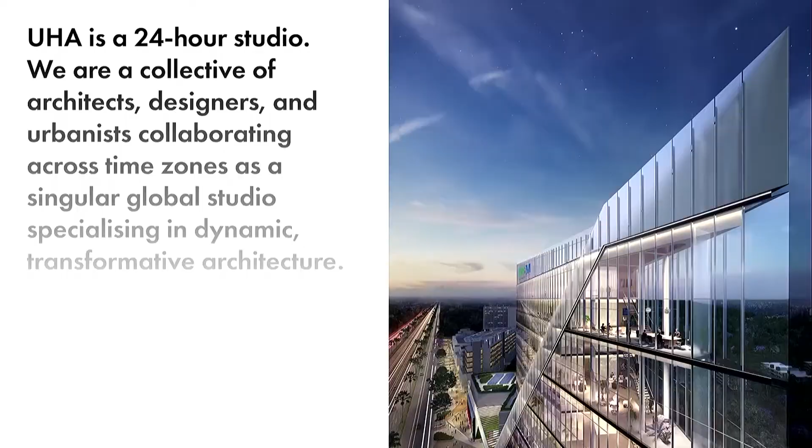So it sounds like a cliche, but we're very much a 24-hour studio. We have a team from Tokyo, Japan over to Mexico City, so we can actually work 24 hours. It's a very young team.

Our studio in Mumbai, the average age must be about 25 to 30. It's an all-Indian crew here in India, and we're doing some amazing buildings in Gurgaon and Delhi, Mumbai and Pune.

We were established in London in 2011. Before that, I used to work for a fairly well-known architect called Norman Foster. And the Mumbai office was founded quite early on in 2013. So we have these separate studios that work as one collective.

Now, how do you work efficiently in all of these places? And I've underlined the word efficient because it takes some logistics to make all of that happen.

I'm not quite sure why we're going from west to east, since the day starts in the east, but we have a series of satellite offices, our headquarters in London. We have one guy in Japan, and all of our satellite offices are set up and run by guys who've worked in the studio in London for us for a number of years and then go back home. I've lost count of how many nationalities we actually have in the studio, but we are genuinely working in 6 time zones to produce projects in all of these places.

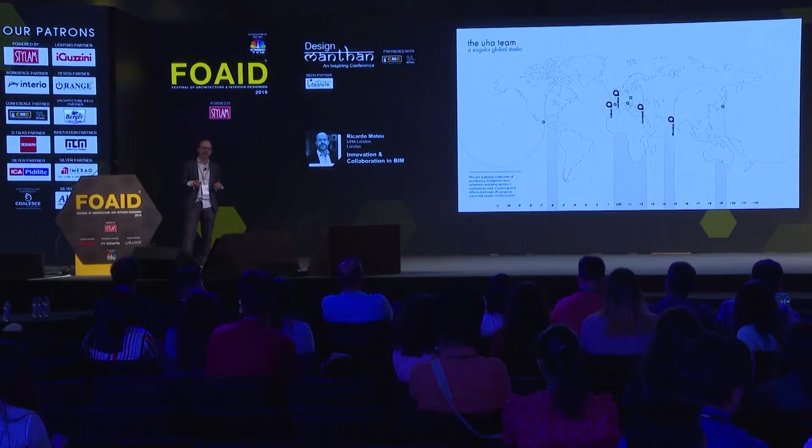So we have the headquarters in London. We have a new office just opened in Lisbon, Portugal, and they've already picked up a new project over there. We have a new visualization arm set up in Budapest, Hungary. Quite an established office now in Cyprus, where we have a lot of work, and our first satellite office, which was Mumbai.

So the 24-hour studio, does it really work? Well, yeah, I think the downside is I have to stay awake for 24 hours to talk to everybody, but we can start in the early morning, briefing Japan, and then they will go to bed and get up the next day and do a day's work while we're asleep in London, and so on.

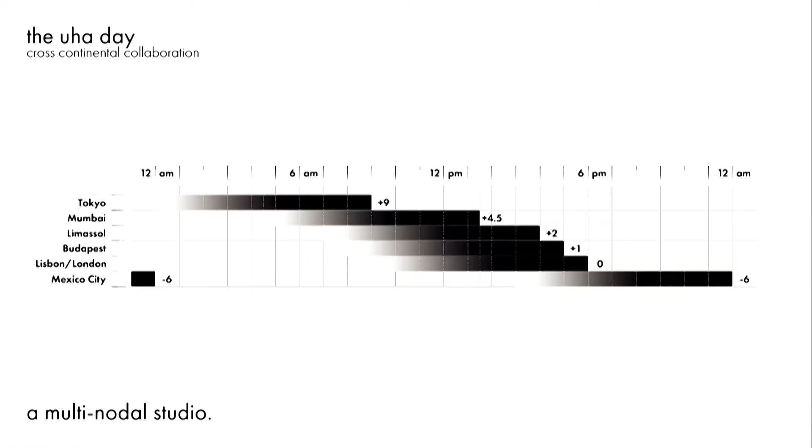So we've got Japan, Mumbai, catching up, GMT plus 4.5 hours. Then Europe, the European offices, which are 2 hours or 1 hour ahead of us. Then London, Lisbon's the same time zone as us. And then Mexico City, which is obviously 6 hours behind. So we have a genuine 24-hour work cycle.

And this allows us to meet our clients' demands. I'm sure all of the architects in the room know that every client wants their project yesterday, generally. And while we can't quite achieve time travel, we can do things in record time to give them the results they want. So how do we do this?

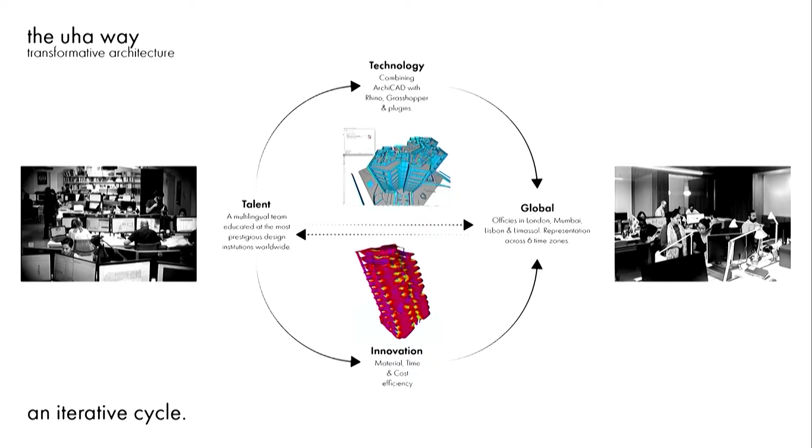Obviously, we have a great pool of talent from across the world, and although the politics of the UK don't seem to be on a very even keel at the moment, we still have a huge pool of talent there that comes to London from across the world. Less Europeans these days, unfortunately, but many Indians, many people from the Far East as well. And we have a great ability to attract these people by doing exciting projects in all of the places we work in.

We'll try and use the most modern softwares available. We're heavily into BIM. We work very closely with Graphisoft and have developed some really interesting plugins between the parametric modeling side of things and BIM, and generally move into BIM at a very early stage in the process. We also have structural engineers in-house in London, so we're trying to innovate and bring structural engineering innovations from quite an early stage in the project.

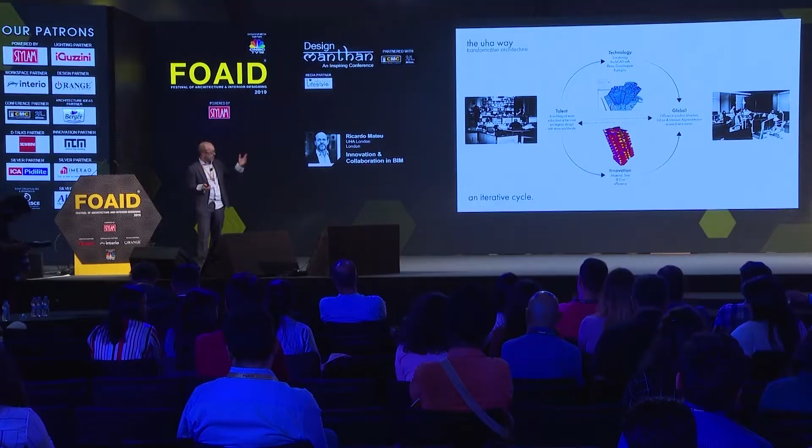It's always a battle to convince clients that we need all the consultants from the beginning, but I think when they see the work that we can produce by working in harmony from an early stage, they can appreciate the results. This is an image of the Mumbai office over on the right-hand side. It looks like it's inhabited by desk lamps more than people, but there's a great team there in Mumbai, one of our best, actually.

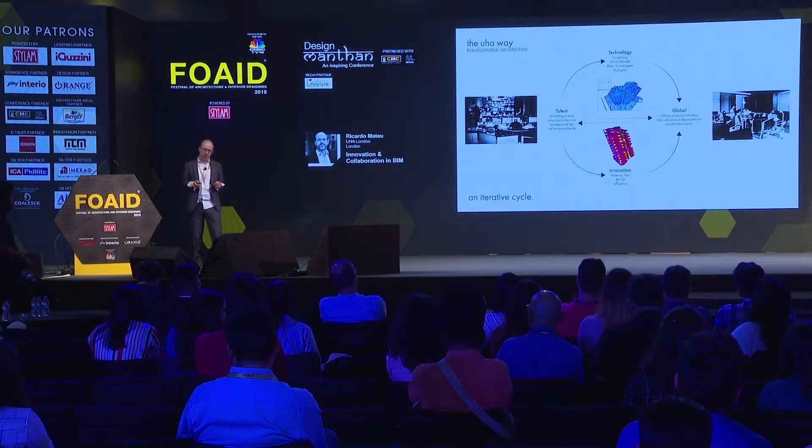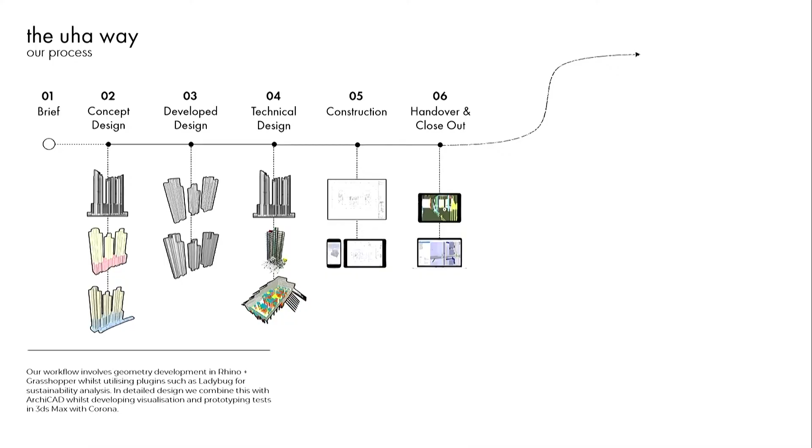So the design process - we start with a brief, obviously. Sometimes it's a very detailed brief, sometimes it's practically non-existent. So there may be some period where we have to investigate that brief.

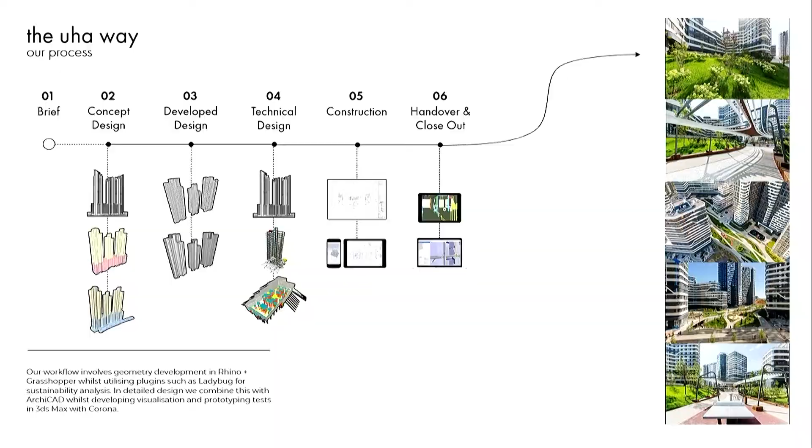Obviously, there are other more organized clients who have a very clear idea of what they want. And so we probably tend to overproduce in the material that we provide them with at a concept level, or even a pre-concept level. And we will always start in 3D and be modeling from the get-go, really.

The kids that come out of school these days generally don't draw anything with a pencil anymore. I'm probably the last dinosaur left in the office with a pencil. So they really get the process going with the 3D work that they do from an initial stage.

As we develop the concept, really by the end of concept we've effectively got schematic design. It's really only a question then of coordinating it with those other disciplines. Obviously, if we've had those other disciplines on board from the beginning, then we're one step ahead.

And we generally develop the design from scheme design onwards in BIM, and we are an exclusively BIM office, really, in all projects that develop beyond schematic design. As I said, we work very closely with Graphisoft, and we've just set up a new team in Budapest, our

visualization team, to collaborate more closely with them and see what innovations we can bring. We've done projects all the way through to GFCs in BIM, although I wouldn't necessarily recommend it. And, well, you can see some of the results.

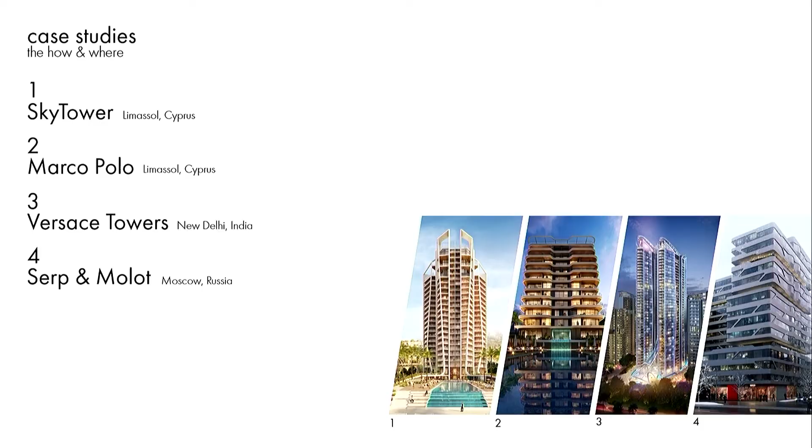Okay, so I want to go through a series of case studies to explain a little bit about some of our different working methods. I asked our communications team to give me a good spread of projects across the world. They managed to pick 2 that are in Cyprus, which is a bit of a shame, but never mind. At least we've got one in India.

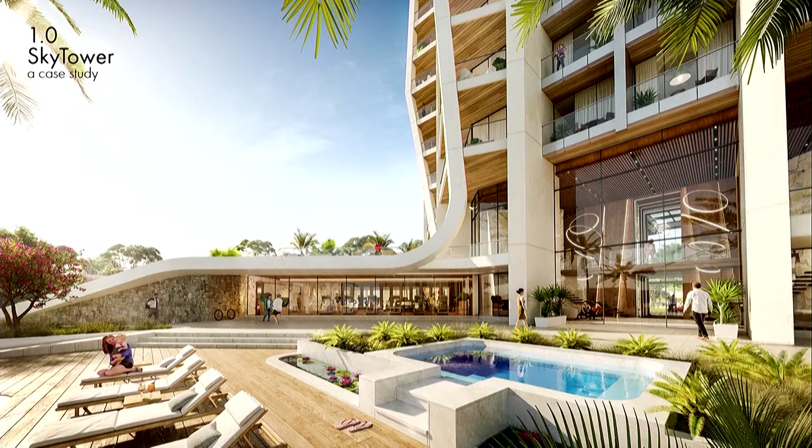So we'll start with Sky Tower, which is a residential block set in these very luxurious grounds in Cyprus. We have a 10-strong team in Cyprus that are architects, landscape architects, and project managers, and we are project managing some of our own projects there.

So this project is very embedded in the landscape, let's say. We wanted to do something that emerged from the landscape, but also trying to express the verticality of what is not an especially tall tower.

There's a lot of competition in Cyprus right now with a huge amount of Russian investment on the island, and there are several towers going up - we are building 3 of them right now. So you need to stand out from the crowd. And we decided on this very kind of slender form with these very simple ribbons, and the idea was to try and pare this design down to as simple an equation as possible.

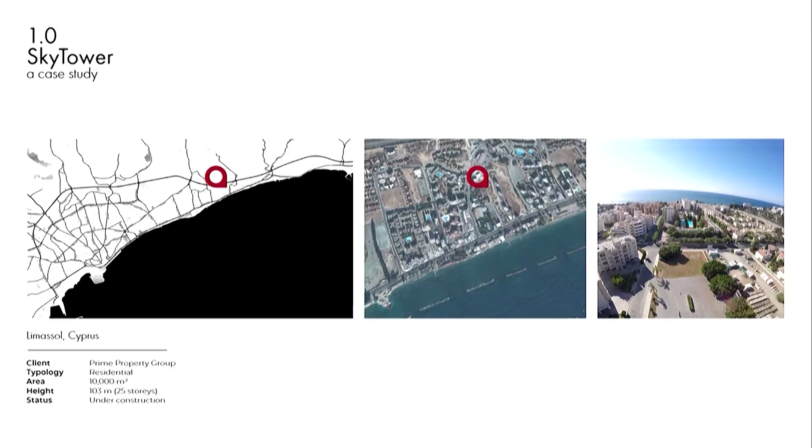This is the site, obviously. We're not quite on the seafront, but some way back, visible from the highway behind and the seafront.

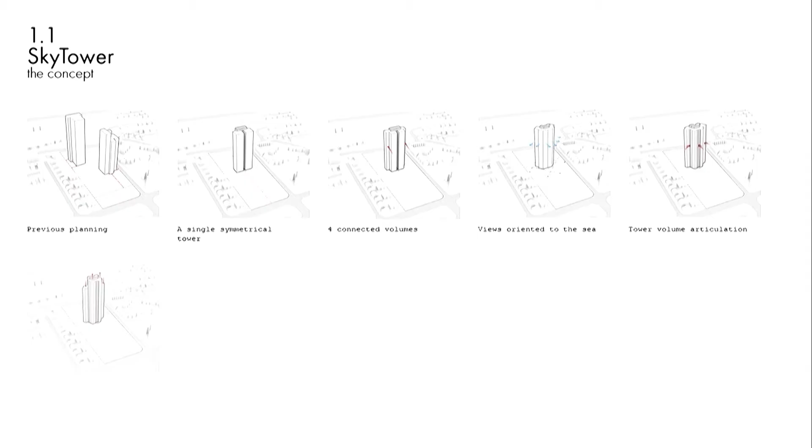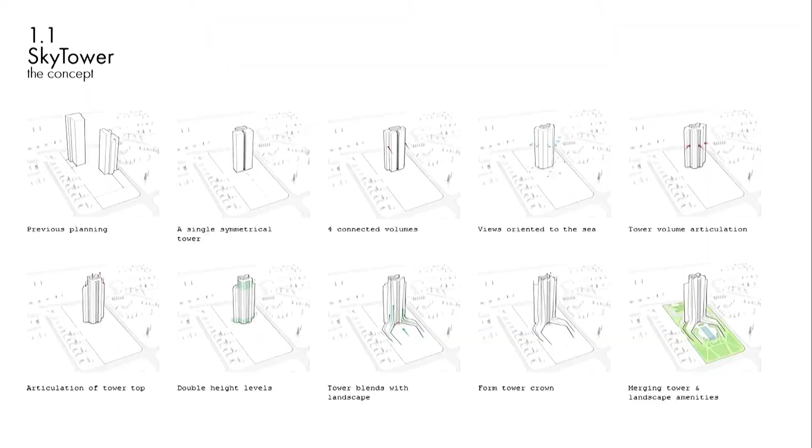So our process - the client had a previous planning agreement for 2 towers on the site, but being a great patron of architecture and having a great deal of good taste, he said to us, well, can you do something with a single block? So we looked at combining 2 blocks together, in effect, to try and create something more consolidated. At the same time, we wanted to express the verticality.

So obviously we put grooves into this block, we shaped the block, and we embedded it into the landscape so that it felt like part of its context.

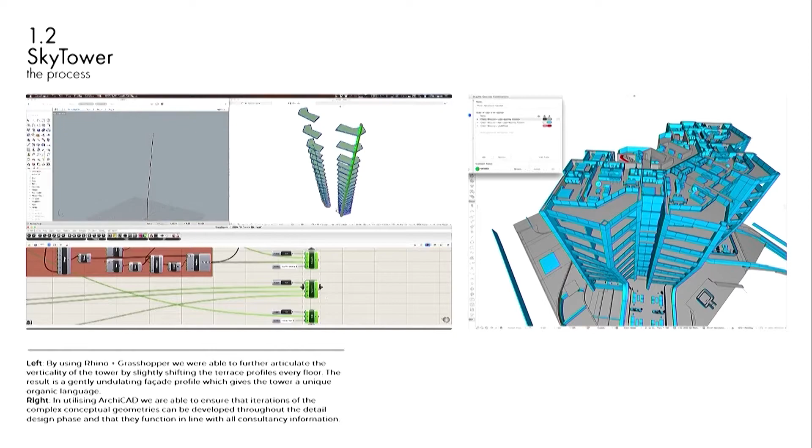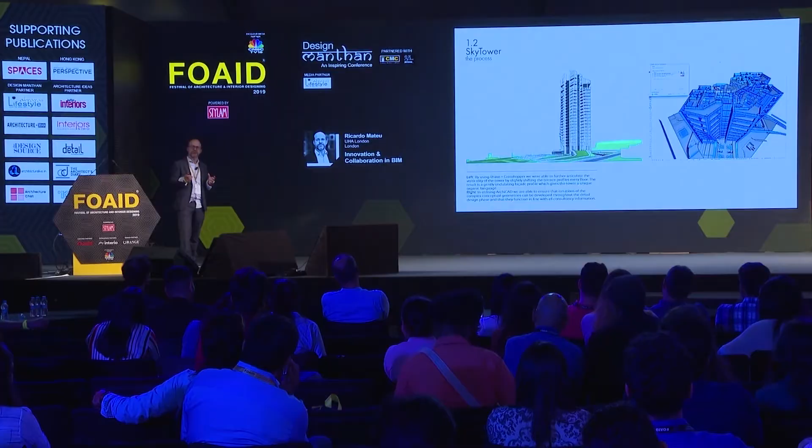Now, from a software and development point of view, we pared this down to a very simple exercise of tweaking the ribbons, really, in a parametric model that then links directly to the BIM model. And this enabled us to do real-time changes to the geometry of the building to eventually get to what we have, what you see in front of you here.

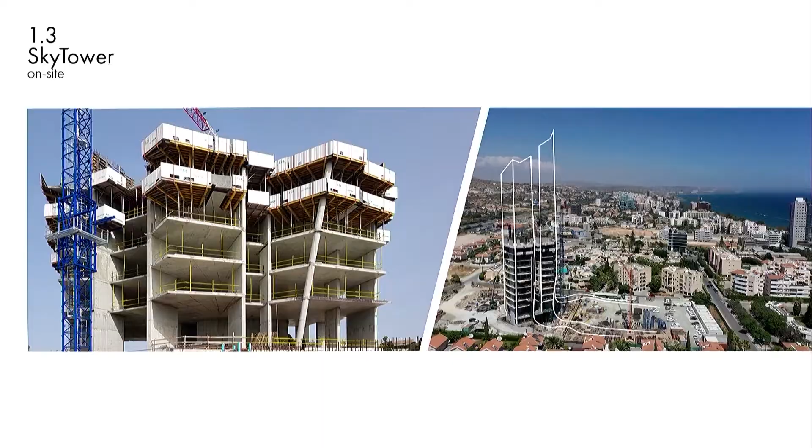This is a very early image of the BIM model on the right. And this is the building as it is today - the one on the left-hand side is the building today. This photo was taken just a couple of weeks ago. We've still got some way to go, but they're building incredibly fast.

You can already start to see the raking columns in the image on the left-hand side. And we hope to be topped out early in the new year, working at a cycle rate of a floor a week.

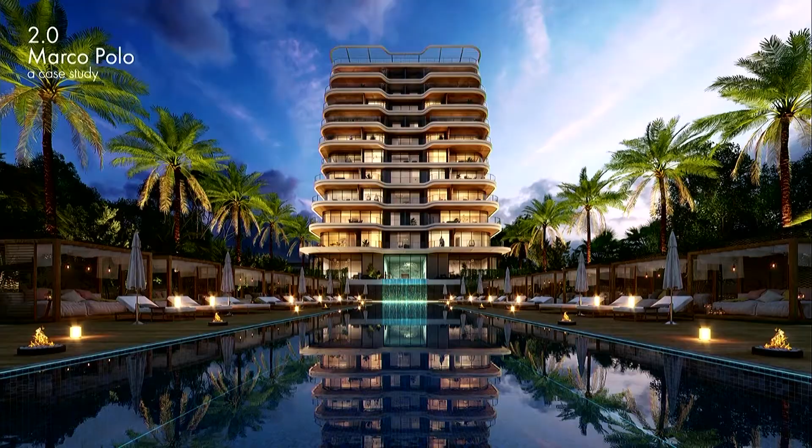This is the second project in Cyprus that I wanted to show you, really as an example of structural innovation. It's again a high-end residence set in luxurious grounds, but it has something rather unique about it, which is that it leans by 20 degrees. To put that into perspective, the Leaning Tower of Pisa is somewhere between 5 and 10 degrees depending on what article you read. This is 20 degrees - quite a significant incline and an interesting structural problem for our engineers.

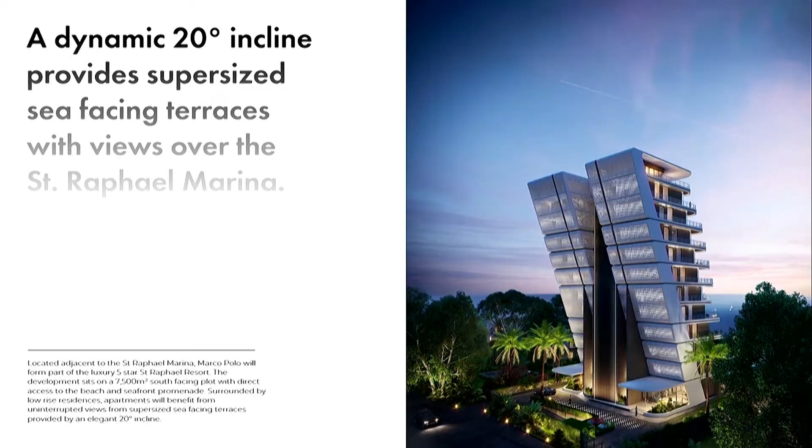Now, our client doesn't like to be a guinea pig. He said, why do I have to? First of all, we convinced him to do post-tension slabs, the first private developer to do that on the island. Then when we came up with this crazy idea of a 20-degree incline, he nearly had a heart attack. But what this gives him is these amazing balconies at the front that are effectively free of FSI.

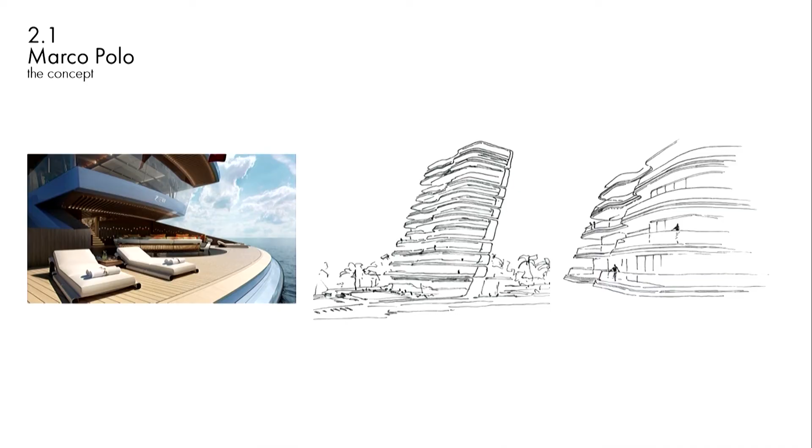There's the location. The thinking behind the project, I guess the inspiration, was the super yacht. The marina is just in front of the project, and we wanted to capture some of that spirit, those big, wide, open spaces.

We used the BIM program and some quantitative analysis to calculate that the increase in structural cost was around 5% by putting in the incline. We did various studies - no degrees, 10 degrees, 20 degrees. But actually the gain that the client gets in terms of sales from these huge verandas and balconies to the sea is much greater than that, which helped to convince him. So you really have to use the technology to fight your battles for you and provide the arguments that can convince the clients to do these somewhat crazy things.

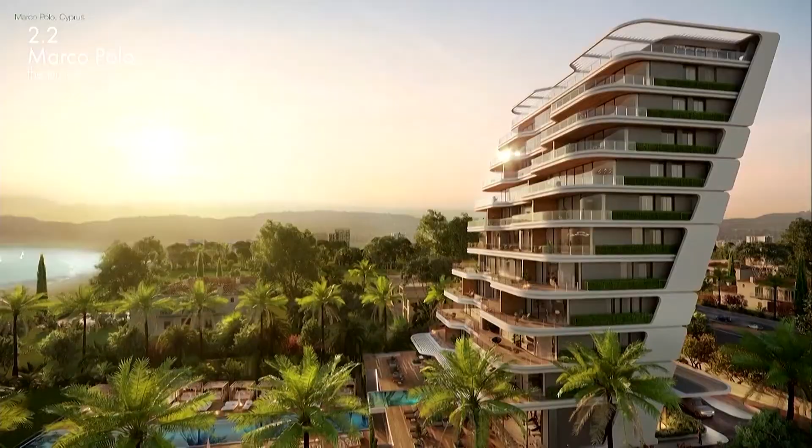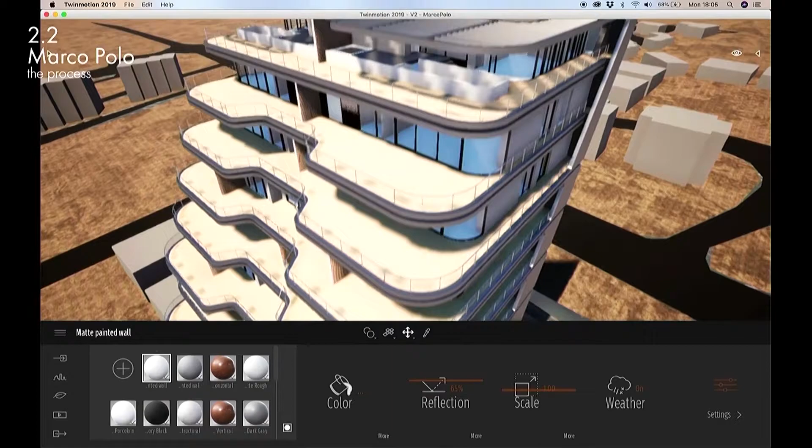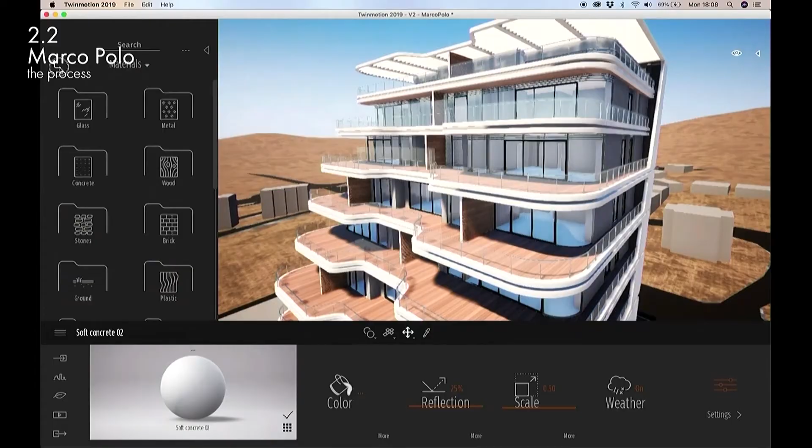This is a quick video of some of the design process, working in Twinmotion, which is a visualization program that ties in very nicely with our BIM program with ArchiCAD. We can draw elements very quickly, attach materials to them very quickly, and render them in an incredibly short space of time, doing many different iterations of the design in a short period. These studies are really in-house studies for us to look at and decide what we want to present to the client, so it's a very quick exercise.

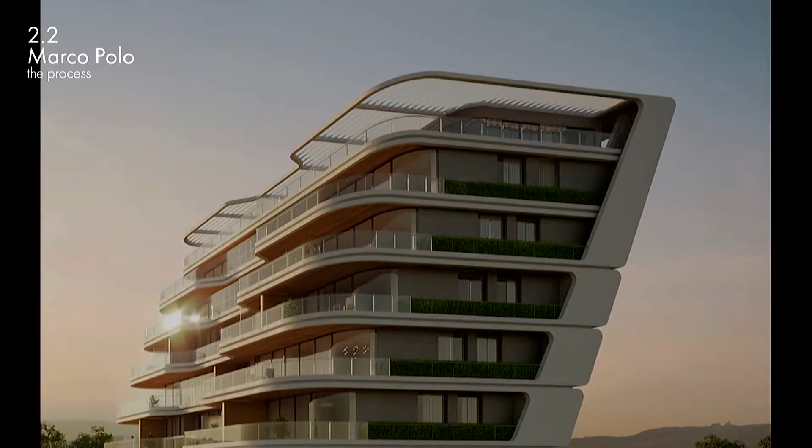You can even throw in some hedges, some greenery around the side, and this is the kind of render you can achieve with this very quick process. The final result - well, this is on site at the moment - we hope will be a very elegant expression of those early ideas. I'm quite convinced that no one else, no other developer, certainly in Cyprus, will attempt building such a structure.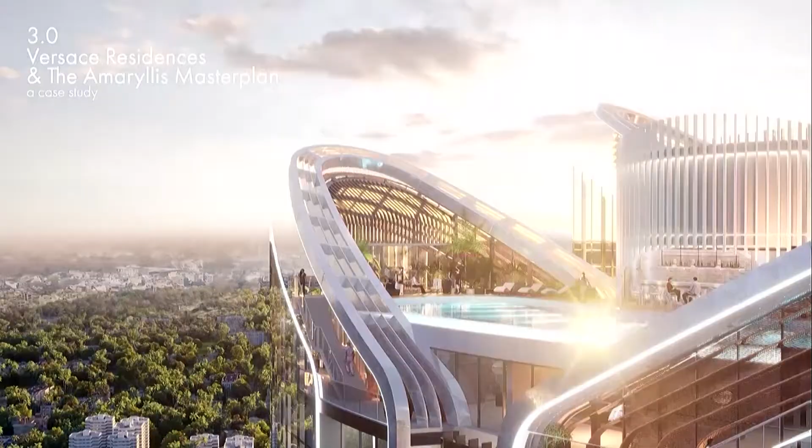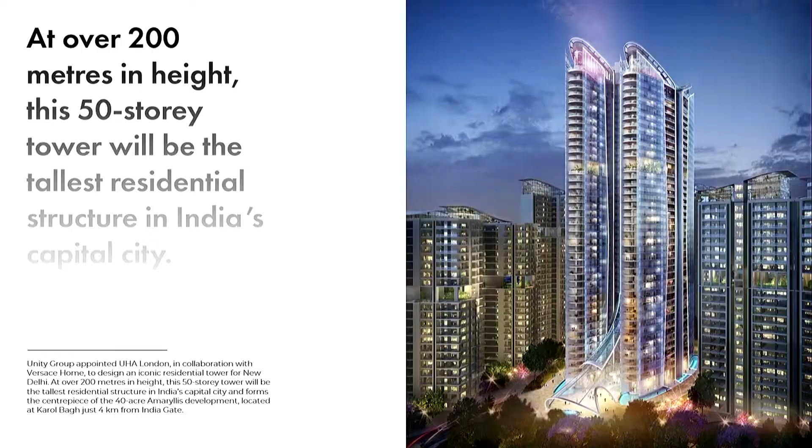Working with local architects GPM, and Unity Group, who are the developer, we designed this tower to form the centerpiece of the Amaryllis development, which is quite a dense residential development in the heart of Delhi, in Karol Bagh. It is currently on site. It will be over 200 meters in height, the tallest building in Delhi. We really wanted to capture something of the essence of Versace in this building. We've gone on to redesign all of the surrounding blocks as well, although I'm not able to show you that at the moment because it's still under development.

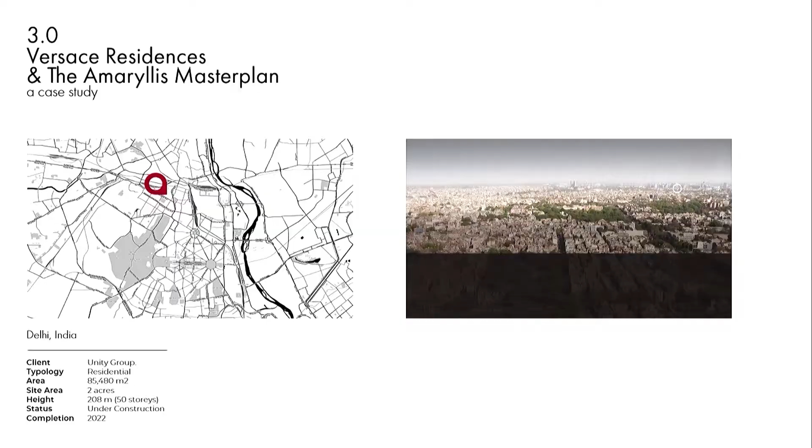These are the views from the top of the tower. Obviously, we're hoping for some cleaner air and not too much smog in the future so we can appreciate those views.

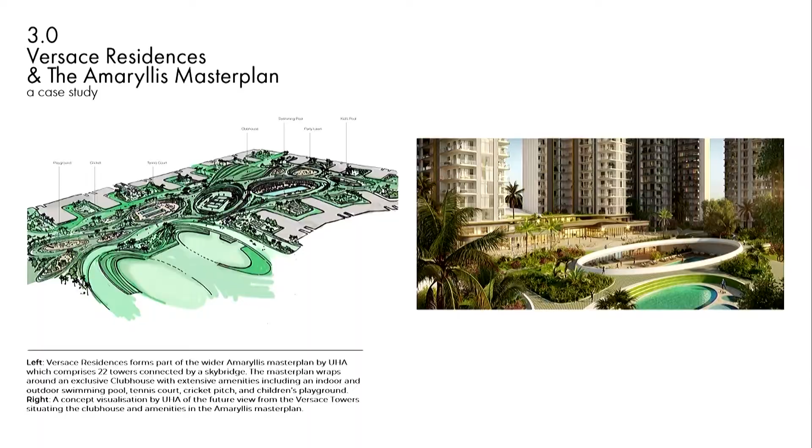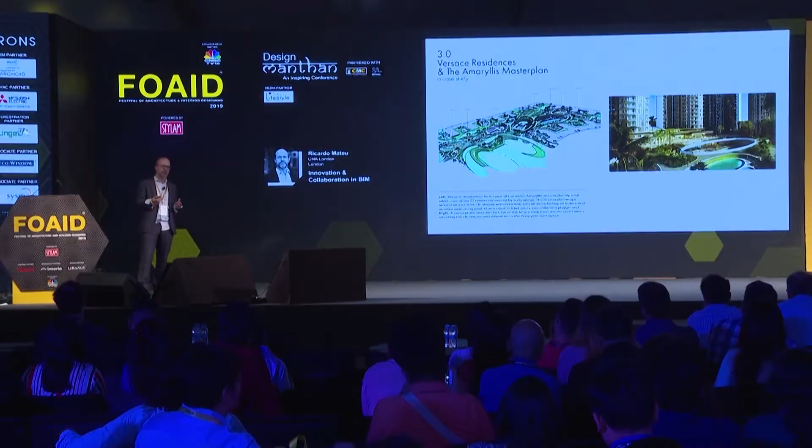As I mentioned, the master plan is quite a dense, developer-led development, with a relatively large area of landscape in the center, and we've tried to make the most of that. When working in Gurgaon and in Delhi, where the terrain is largely flat, we always like to try and create something of a landscape, some undulations to create more interest so you're not just looking at another block of apartments. We've tried to work very carefully and closely with our clients and landscape architects to create this landscape of hills, mounds, grottos and caves to complement the architecture and give it a very high-end resort feel.

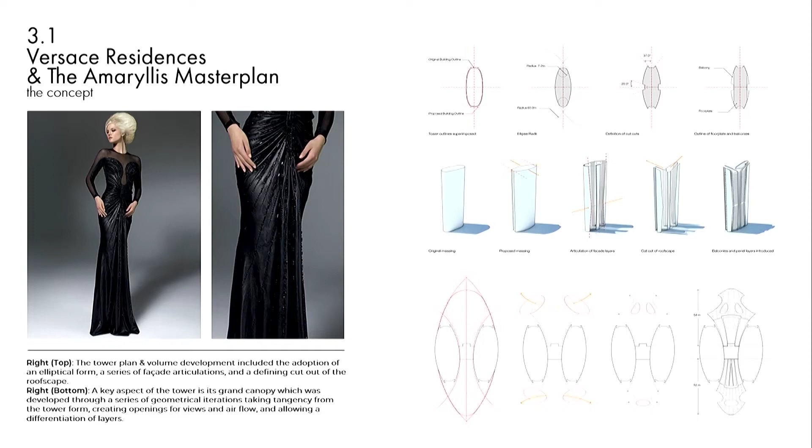Taking as our inspiration the haute couture of Versace, we looked at some of those spectacular designs from the great man himself and tried to reinterpret that in our architecture in a sensible, more subtle way, again accentuating the verticality of the tower. We have these kind of shoulder pads at the top of the building, if you like, where the amenity spaces happen, and this shows you a little bit about how the geometry was developed and worked through to produce the design.

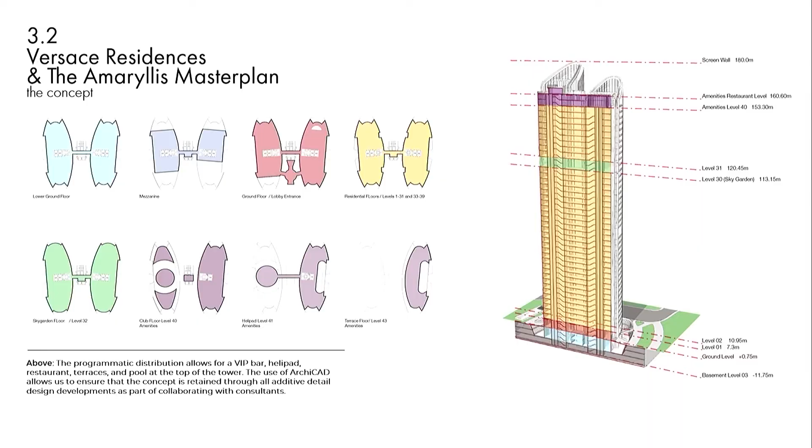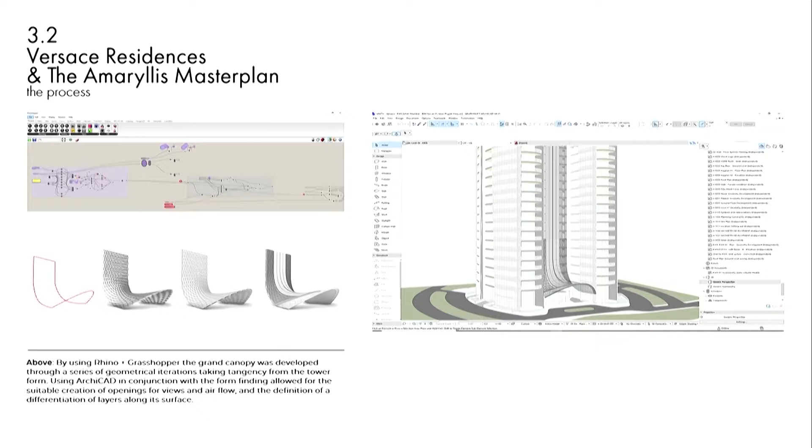It's quite a complex building. It has many different types of floor plate. We are currently up to GFC's to the high-rise of the building and pushing hard with our cladding design. There are a number of complex elements on the building, such as the entrance canopy, which is a very complex piece of geometry that we're at the moment trying to rationalize and make sense of.

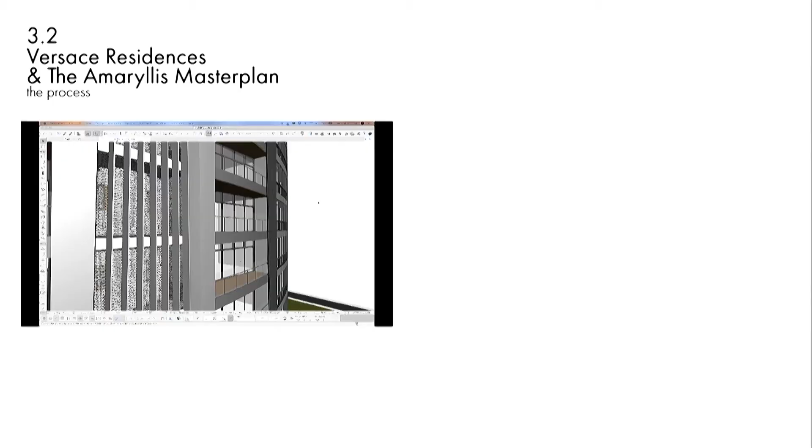It's clearly not going to be the cheapest building to build in Delhi, but we are doing our utmost to rationalize this rather complex geometry.

And here it is on site. They have completed the raft foundation now, so we are going to start moving ahead quite quickly now, and you'll start to see the building coming out of the ground in the new year.

This is some imagery from the site. These are the surrounding blocks, which are obviously at a much more advanced state. They're up to level 26 or so now.

And the overall master plan, all of the 15 towers on site, except the Icon Tower, will be linked by a sky bridge at level 26, which is going to end up being a kilometer in length.

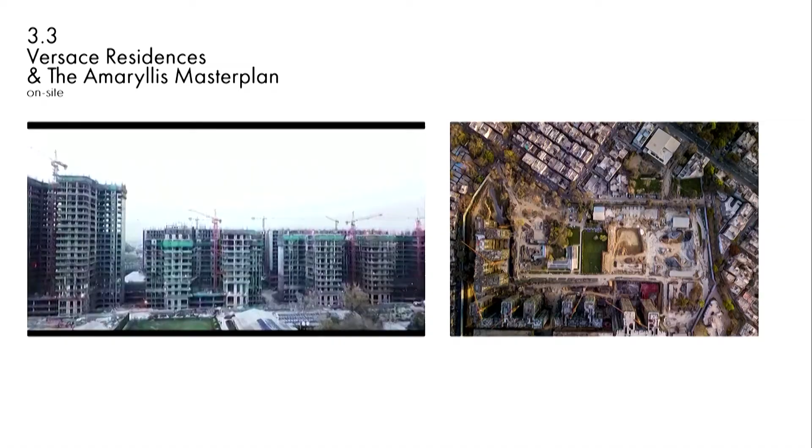This is the final project I'd like to show you, which is on a much more different scale, an urban scale. It was a competition that we won in Moscow, Russia, which my esteemed colleague, the other Ricardo, was on the jury for. He actually voted for another team, I'm fairly sure, but we managed to win out in the end with the client.

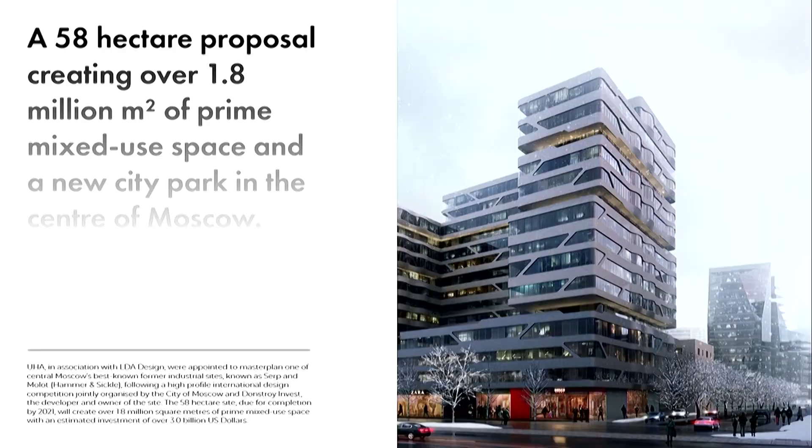It was a very interesting project in that it was a huge site, 58 hectares in size, roughly a triangular site, and it housed a disused steelworks. The name of the site was Serp i Molot, which means hammer and sickle, the symbol of Russia, if you like.

It was a heavily polluted industrial site, and we took the decision fairly early on to get rid of most of the buildings there. So in contrast to my colleague's presentation this morning, we looked at a very different approach here, and apart from this little building here, everything else was new.

We originally proposed three buildings to be retained for heritage value and adaptive reuse. The client said no, so we ended up with just the one, which is a museum really to the former steelworks that were on the site.

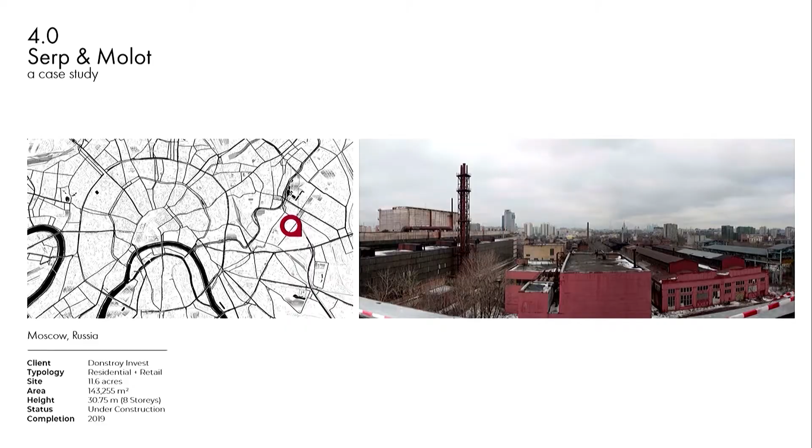So we went on to do the architectural design. Here you see some of the existing buildings. They were of pretty low quality, to be honest, and didn't really have much potential for adaptive reuse.

But what we set about doing, together with our partners LDA, who are responsible for the landscape design, was trying to create a new neighborhood in the city. Remember, this is 1.8 million square meters of development. It'll take some time to build, but really what we wanted to do was not only create a mixed-use master plan, but really give an identity to these different neighborhoods. There's a business center, media center at the heart of the site.

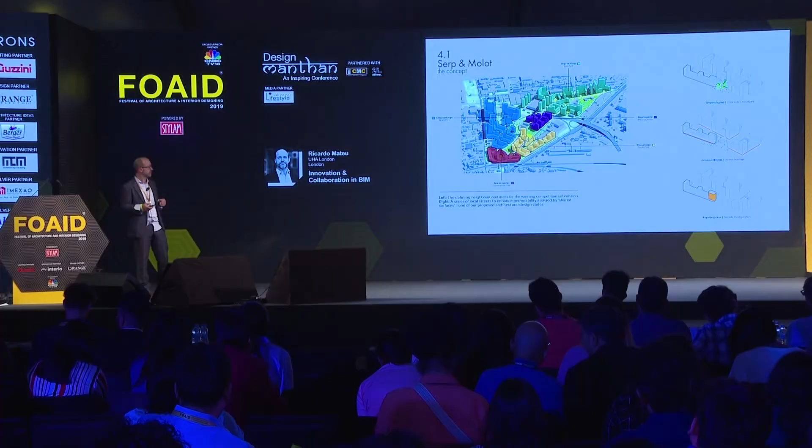Retail at one end, there's a metro station here and another metro station here, and then create these new neighborhoods of low to mid to high rise across the site to create a variety of architecture, all within the constraints of this site. There are very strict height guidelines here because we're 2 miles from the Kremlin.

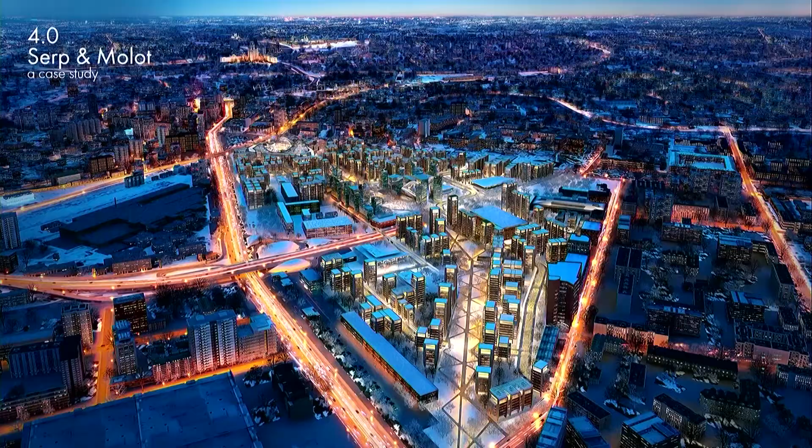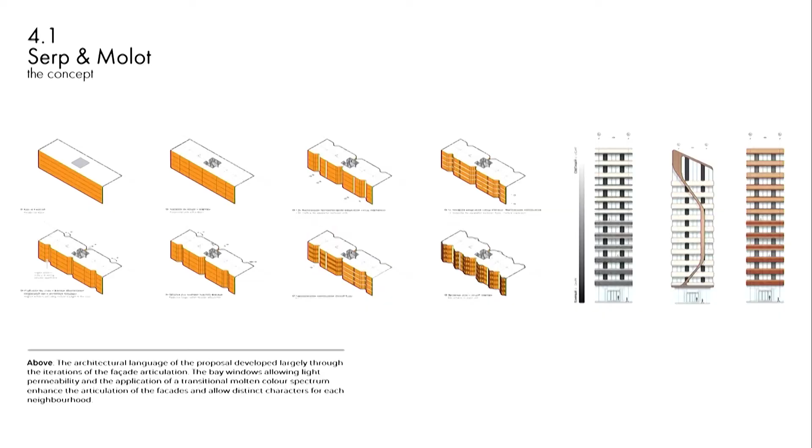So the Kremlin is just here. And it was quite a long process. We went through a very detailed analysis at a master plan level, looking at the palettes to use and give each neighborhood its own identity.

Obviously the winters in Moscow are pretty fierce, and every client you ever talk to in Russia is all about how's this going to work in the 6 months of the year when it's sub-zero, and I mean seriously sub-zero. I've been there a number of times in December, January when it's minus 30 and the work still goes on. So this is one of the residential blocks that we designed in some detail, and another one.

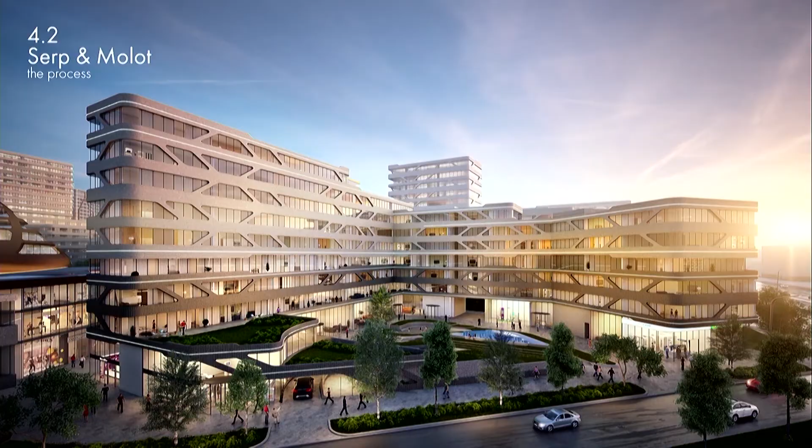On a smaller scale, let's say, we adopted those ideas of green roof and green park. The whole project is really centered around a green park, which was initially much bigger in the competition design, but obviously got squeezed by our developer client to get maximum return.

This is it on site over a year ago now, at a fairly advanced stage, and I'm going to finish on a small video of the project as well.

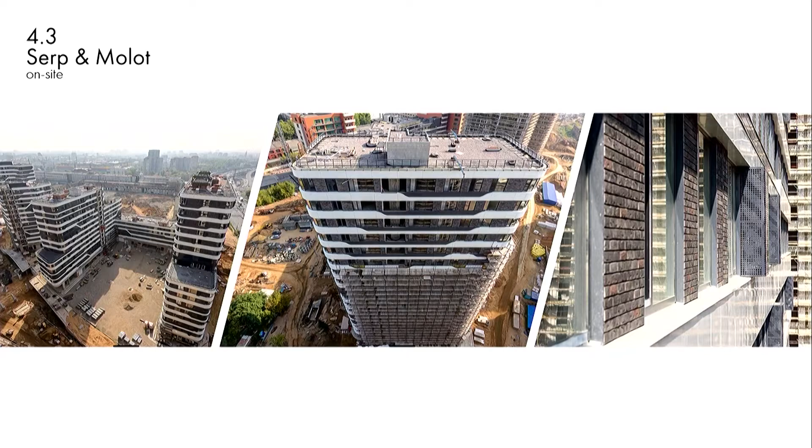But there's a variety of palettes, as I said. There's some very clean looking buildings. It's unashamedly contemporary, and if you know Moscow, there's a lot of modern buildings there that look like old buildings. So this was a bit of a shot in the arm for Moscow. At the same time, they're very keen on solid building materials. Aluminium cladding was a little bit sketchy for them for residential, so we did include some brickwork as well.

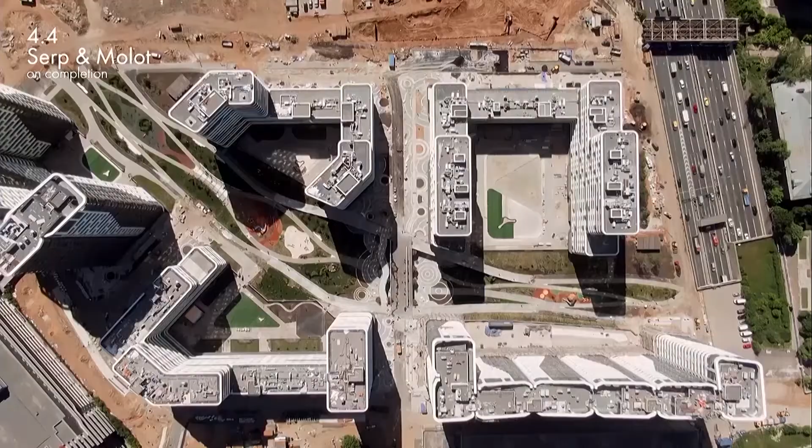So this project is really about transformative architecture. And of course, none of this would be possible without our fantastic clients. I haven't shown you many of the Indian projects, but we have a fantastic group of clients here in Mumbai as well that we're very grateful to.

One of our earliest repeat clients is M3M, who we've been working with since the very beginning. In fact, they were our first client in India, and we're now working with many of the big names here. So thank you very much, I hope you enjoyed it.